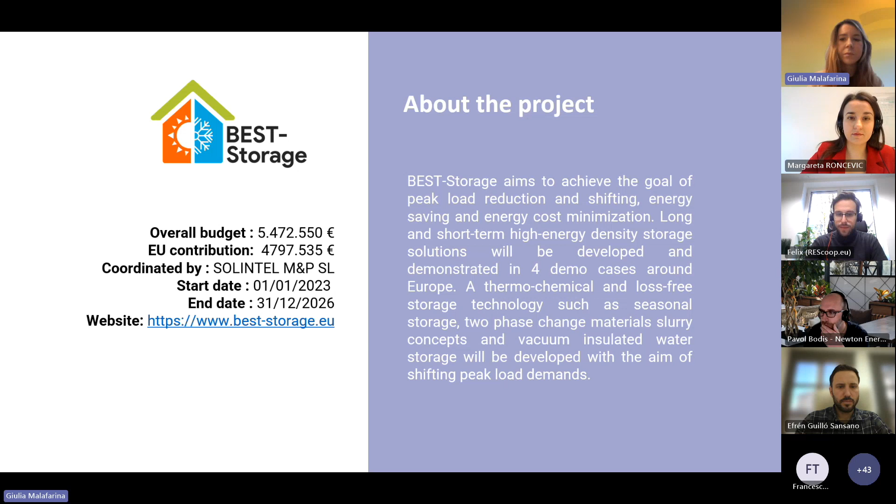Now, without taking too much of your time, I would like to give the floor to our first speaker. Margareta Roncevic will give the opening statement. Margareta works as a Junior Policy Officer for the European Association for Storage of Energy, dedicated to advancing energy storage solutions in the European Union. She actively monitors energy storage legislation, leads work groups on key topics, and engages with members and stakeholders. Her main areas of expertise include thermal energy storage technology, sustainable batteries, and different legislative acts.

She also has previous professional experience in public policy and project management. Today, Margareta is going to give us an introduction and an overview on thermal energy storage solutions. But without further ado, I'll give the floor to you, Margareta, please.

Thank you very much. Yes, well basically, you said everything - I also had a little speech, but you covered pretty much everything. First of all, thank you for inviting me, and I'm very happy to be here. As already said, I will give you a short introduction on thermal energy storage, a bit of an overview on what we do as the European Association for Storage of Energy, and at the end of the webinar we will have time for questions. You can also send them in the chat.

So I will start with the presentation on our association, the European Association for Storage of Energy. I will give you a brief overview on the energy storage technologies in general, and then we will focus on thermal energy storage specifically. So what do we do as a European Association for Storage of Energy, or EASE?

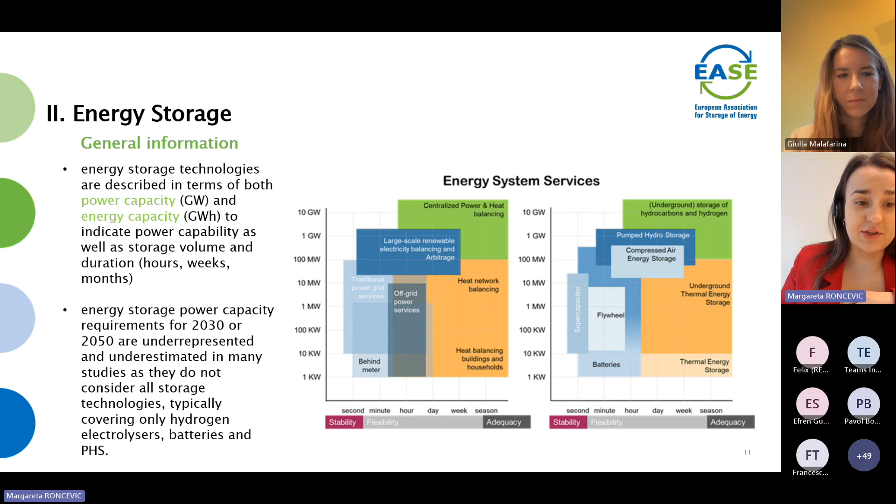That is something you constantly hear, at least at the European Union level. However, we don't only represent batteries or hydrogen—we're a technology-neutral association. So we cover all of the other energy storage technologies, which there will be a slide on later.

In terms of applications and why energy storage is important in the energy transition, these technologies can provide ancillary services to support the distribution infrastructure, services to support transmission infrastructure, and many others. Of course, not every single energy storage technology can provide all of the services listed on the slide, but each technology does have its place within the system, within different projects and business cases, and can excel in certain services in some way or another.

In this slide, you can see all of the family of energy storage technologies that we support or represent. As you can see, it's much more varied than just batteries or hydrogen. Of course batteries and hydrogen have their place, as I already said, but there is also thermal energy storage, mechanical, and so many more others.

We are today going to focus, of course, on thermal energy storage. As you probably already know, thermal energy storage is one of the, we would say, more neglected storage technologies in terms of how much it is recognized in legislation, specifically in the European Union. This is something that, for example this year, we have been working very hard to gain more traction on these specific technologies.

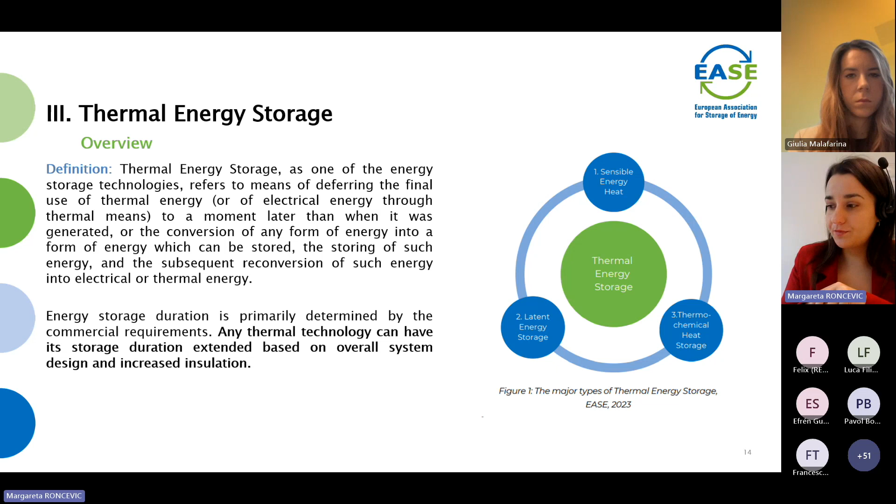We are going to go a little bit more into detail on these principles of thermal energy storage. As you saw on the previous slide, we have three main ones. With the sensible heat storage, this is the most common one, the one that you're going to find the most in commercial uses. For each one of them, we put what is the energy storage temperature range and the storage duration, and again, this can be adapted. The differences between these technologies are, of course, the materials that they use and the types, so if it's going to be liquid, if it's going to be gas, and so on and so forth.

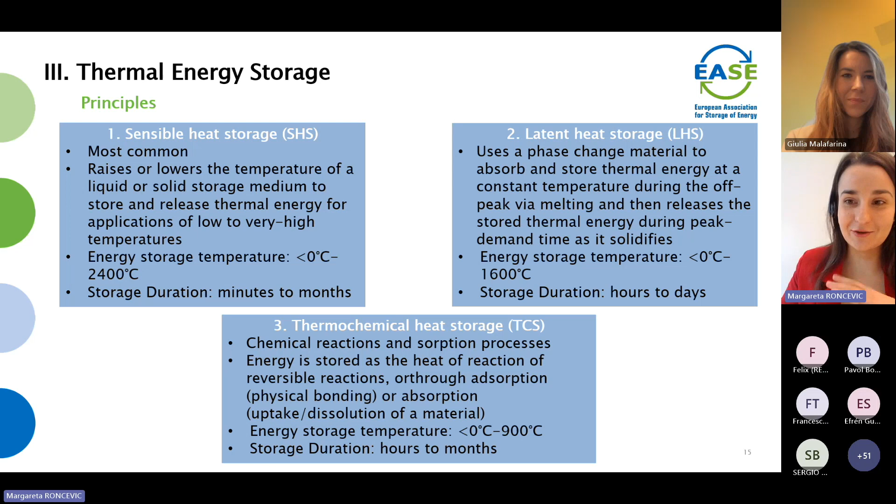Again, all of these storage technologies have their own research potential. Within the subtypes, they have different technology readiness levels, which are rapidly changing. I'm not going to read you out all of these definitions, but if you have any more questions and want to learn more, please feel free to ask later.

Something I would highlight is that this topic of industry decarbonization is gaining more and more prominence, more specifically in thermal, when talking about thermal energy storage. So you will probably hear a lot of applications of thermal energy storage in industry decarbonization webinars and potential, and it is one of the best energy storage technologies to be used in this segment. Now, of course, it doesn't mean it's the only service or the only area where it can be used, but it is definitely something that thermal has great potential in.

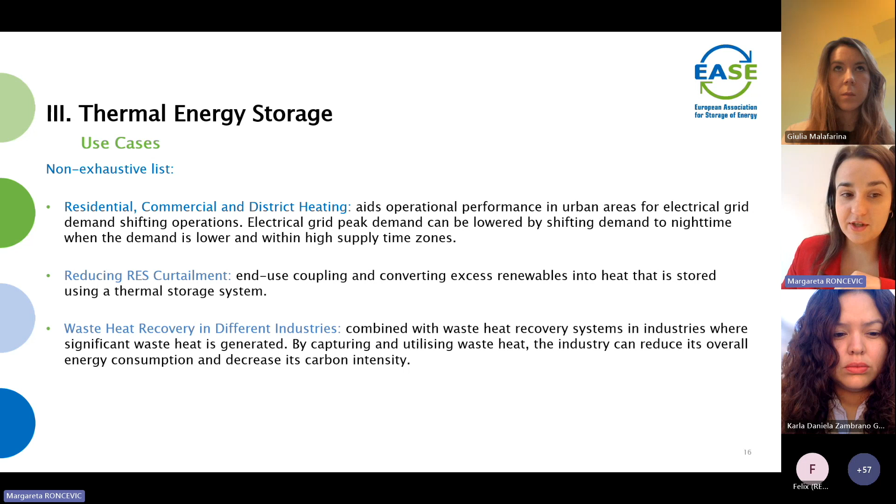The challenges that thermal energy storage faces in its deployment reflect the challenges that other energy storage technologies face. So there's no big differences between, for example, thermal and mechanical energy storage. The only thing that would be different, for example with batteries or hydrogen, is that they are much more recognized on the regulatory level, as you may be familiar.

This year we have published - the European Union has brought the batteries regulation into force, which addresses the whole life cycle of the battery, which is quite substantial and quite good in terms of incentives and recognition. What we would like to see is an energy storage strategy on the European level, but also specifically addressing other energy storage technologies. But okay, we need to go step by step.

For the specific regulatory challenges that thermal is facing, one of the biggest ones would be the double taxation. Again, this is something other energy storage technologies are also facing, which basically means that the taxation occurs when the stored energy is taxed - both when it's initially purchased or generated, and then again when it is discharged or utilized. So of course this leads to a great economic burden and discourages the adoption of energy storage technologies. There's also a lack of financial incentives, again because it's not recognized on the regulatory level.

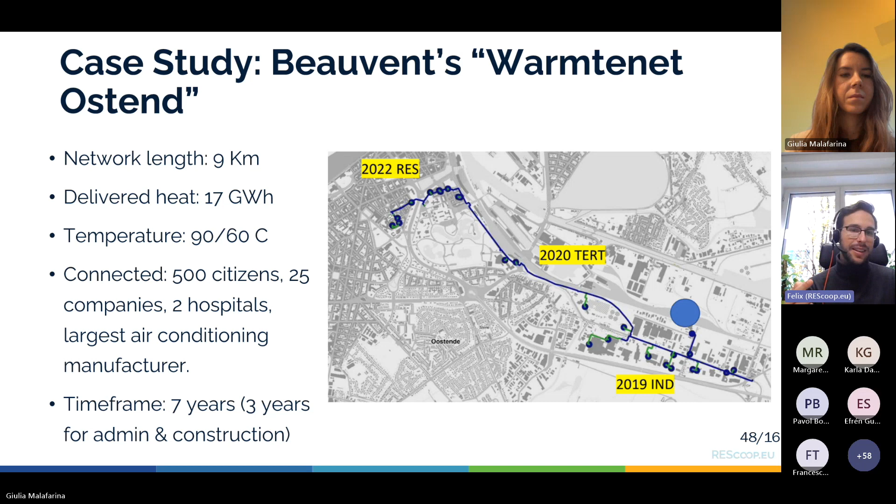Once they were comfortable enough with knowing how to operate the district heating system, they decided to open it to citizens, because you need to make sure that you do it well. Because you don't want people to be disappointed at the project, because that means that they will be disappointed at the transition itself. So this is an interesting case, because first they focus on the consumers of heat rather than in getting membership.

I mean, they do many things, right? They do, for instance, a renewable energy festival in summer. And in this energy community is citizen-led, but it also has municipalities and SMEs in it. So in this case, they do festivals in summer, like I said. But here they decided to work together with a kindergarten, because the children were very curious about the renewable energy.

So the kids decided to go to coffee houses and take their waste coffee. And from this waste coffee, they gave this to the energy community. And the energy community made coffee pellets with this.

So between the waste coffee that the children were gathering, and the municipal prunings from the forest, because it's in the mountains, they were able to do a new kind of energy, if you will - a new kind of pellet.

And the children gathered around 1 ton, so enough coffee to make 1 ton of pellets. And the energy community told them, now you can do as you please with this energy. So of course, for the first time, they were able to reach thermal comfort, renewable thermal comfort, for a year in this kindergarten.

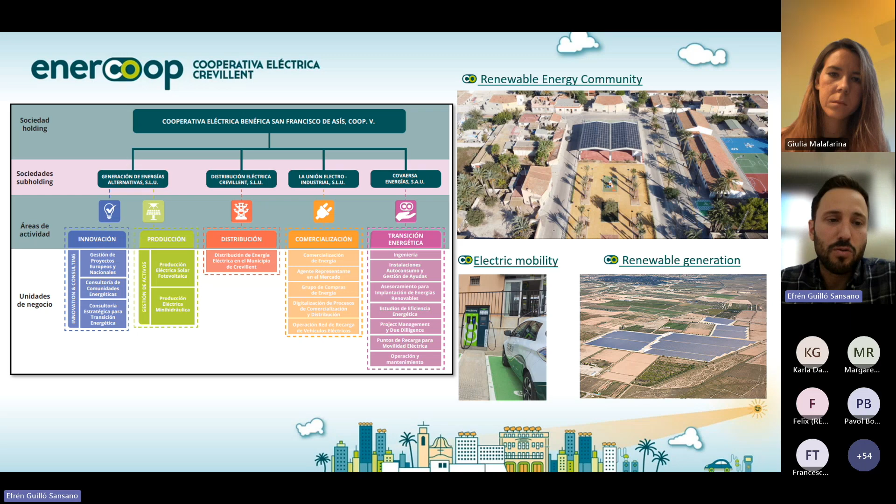As I said, we were founded 100 years ago, but as Felix mentioned, the regulation on energy communities started in 2019 or so, and that's when we started our transition from a historical energy cooperative to an energy community, because the values and principles are mainly the same. That's when we started our most iconic project: the energy community for municipal energy transition in Crevillent.

You can see here a picture of one of our PV installations, which was not just a PV production installation, but we did the whole project of the park and the space below it. It was a project beyond a PV production installation, more a space for community members to participate and be part of.

And also in these installations, we currently have an energy storage system that we use for this collective self-consumption installation.

So what's the model of our energy community? Basically, it's formed by most of the municipality of Crevillent, and we have some collective self-consumption installations, mainly of PV energy, due to the location of our energy community. Here it just rains sand rather than water, so that's what we have and take profit of.

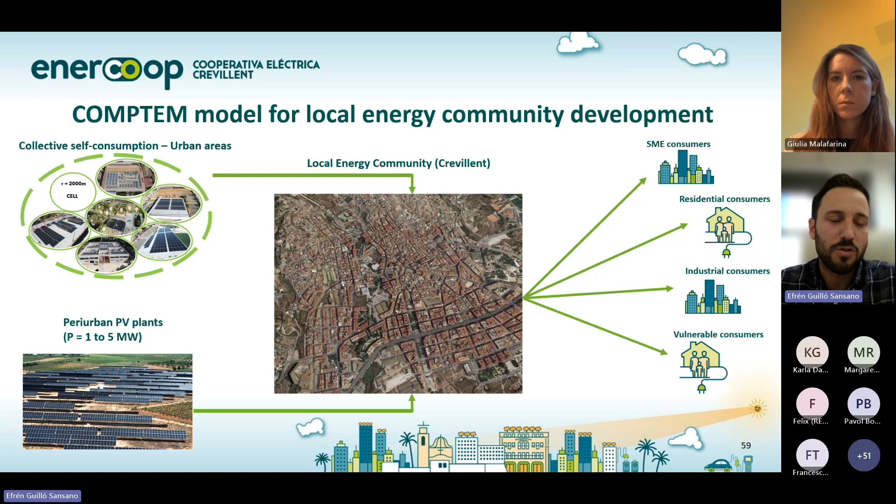But obviously we have an issue, and this is how I would introduce the role of energy storage in energy communities: production and consumption of energy is not done synchronously, but for the energy network, the electricity or energy you're producing needs to be consumed at the same time. It needs to be a balance, and that's where energy storage comes in.

As I said, one of our self-consumption installations already has an energy storage system. In this case, it's not thermal, it's an electrochemical lithium-ion energy storage system. That was part of a previous innovation project that is now completed, the MERLON project, in which we installed this energy storage system for different reasons.

One reason is the optimization of cost. With energy storage, we can store energy and consume it at times when prices are higher, but also for security of supply. We could work with this energy storage system disconnected from the network, so in case there's an event in the network, we have security of supply for the members of the community.

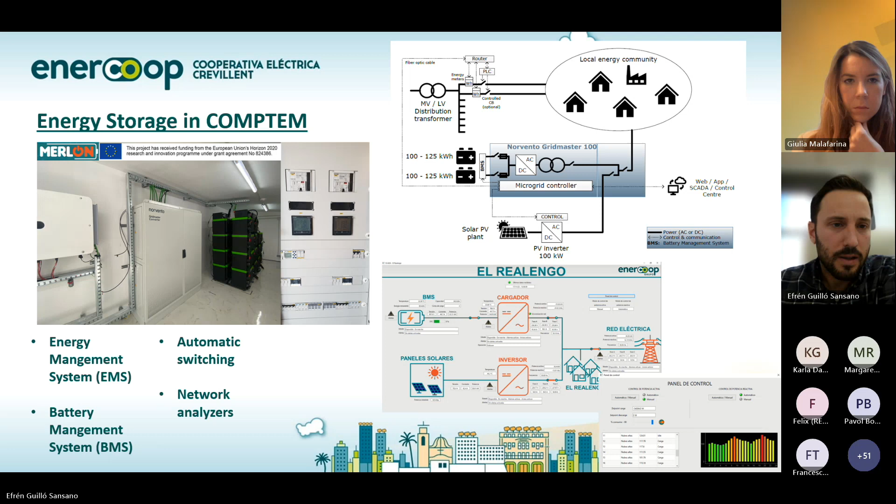But we believe this is just the beginning, and there's more to go. We are involved in different innovation projects, one of which is ECHO, in which we are participating towards identifying the potential of thermal energy storage in our energy community, but also in order to provide services to the system and optimize the use of both thermal and electrical energy storage.

We are also involved in other projects such as STREAM, which looks at flexibility in local energy markets that will be required in order to participate in the energy system, being able to sell services from these energy storage systems. We also participate in other projects related to data, which is key in order to optimize the use of these energy storage systems, and mainly also in the energy community, where private data is sometimes required in order to optimize this system with the demand of the members.

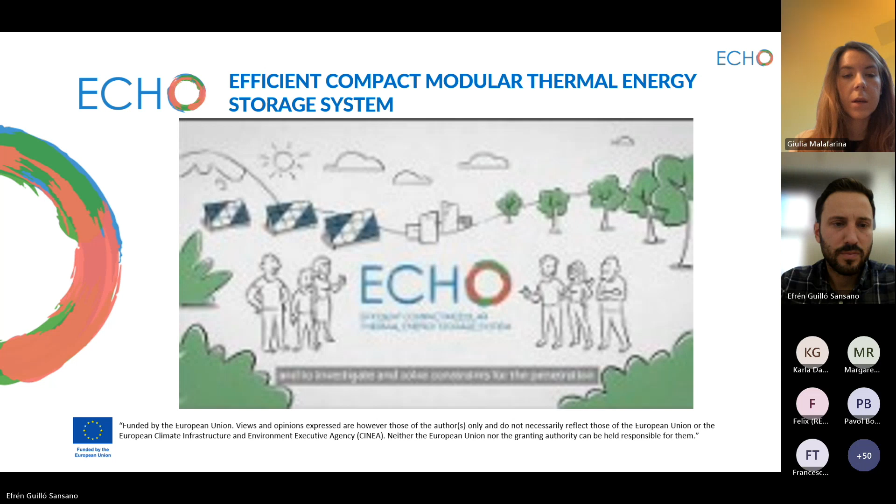So I'll just introduce the ECHO project, with a very nice video that will introduce it better than I will, and I'll talk about it after that. Okay.

So that's the introduction to ECHO. I won't go into the details of the technologies of the materials because I'm not a material expert. I'll leave that—if you want more information, send me an email and I can direct you to people with that expertise. But my expertise is more on the integration of renewable and energy storage into the grid, so I can touch a bit more on that front.

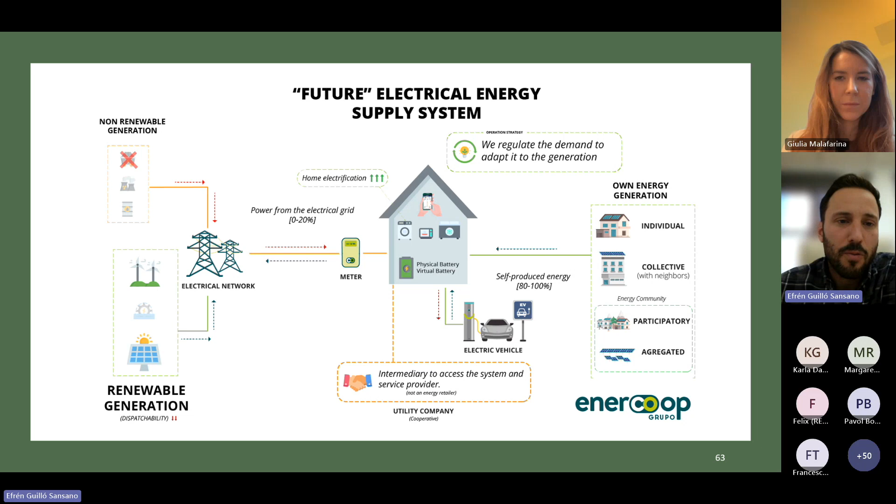So why do we need this energy storage? It's because we are moving to this future electrical energy system, which has non-dispatchable renewable generation instead of the dispatchable nuclear, coal, or gas generation we used until now. We also have production from our side, not just the electrical side, and we are increasing electrification quite a lot, mainly due to transport and heating and cooling. That's the main loads being electrified, and we need to understand all these dynamics. In order for the system to work as it has so far, we need this energy storage to balance everything.

So the ECHO TES, this thermal energy storage, will be adaptable, modular, and flexible, so you can charge it directly by an internal heat pump, or exploit grid overproduction when it's cheap, or even use renewable energy sources in each household. But it can also provide system services. One of the main advantages of energy storage is load shifting or peak shaving of the energy load profiles, which brings cost and energy savings to the community, and also the potential to participate in flexibility energy services to the grid.

However, regulation still—as Karla said—there's a ground and a clear objective to work towards, but regulation isn't there yet to provide these flexibility services to the grid, at least in Spain. There's some work on demand response, network codes, and so on, but nothing final, so there's no possibility yet.

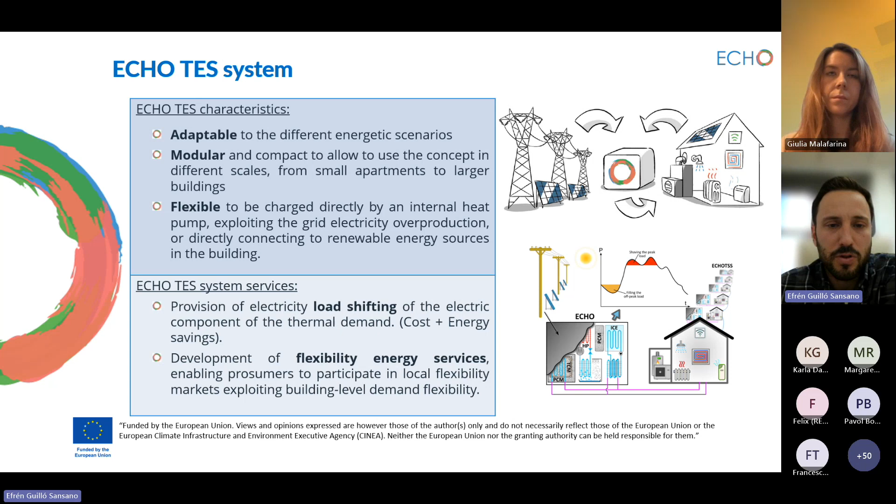So just to finish, how do we see the whole picture? We will have a smart building where heating or thermal loads and electrical loads will be not just loads, but also flexibility from energy storage and renewable generation, all interconnected—for example, through an ECHO TES system. But we go further in the ECHO project, and we try to assess the impact in an energy community such as ours: what would be the effect if each house in our community, the 11,000 members, had one ECHO TES, and what type of services they could provide in an aggregated manner through an energy community manager?

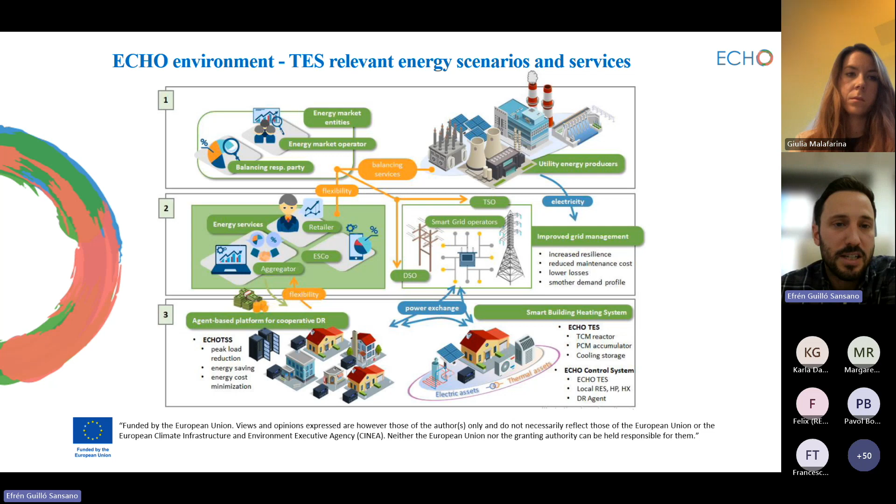So what impact can that have, either in the community electricity prices of the members, or in the grid of the community? How could we support the grid with these energy storage systems? Basically that's the key impact we, as Enercoop, will be assessing within the ECHO project. So thank you for your attention, and if you have any doubt, I'll answer now in the questions and answers.

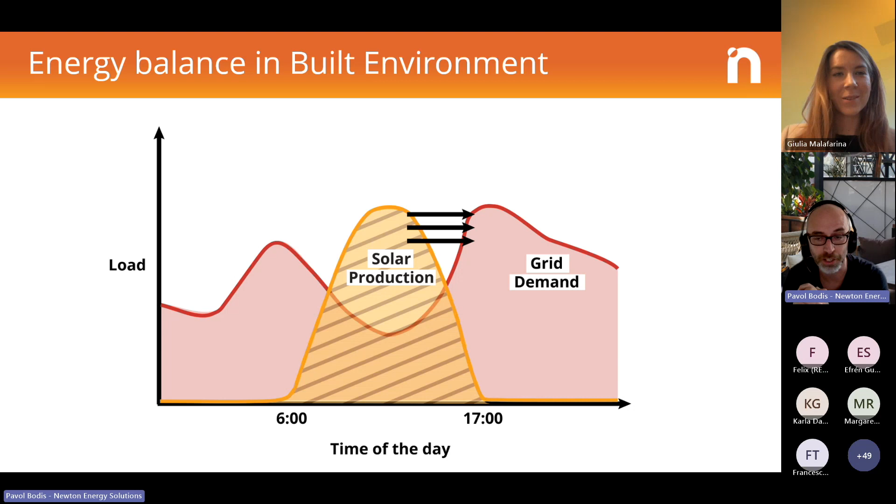So why do we need more options? What else is out there? What are the things we need to address, and how do we address those issues? Effectively, we need to create energy systems that are cost efficient - we have to drive down the cost of the products and the cost of using them, which has to do with maximizing the use of green and cheap electricity or energy, and also minimizing maintenance and increasing the lifetime of the product, which adds not only economic but also environmental value.

The next important aspect for the built environment is compactness. We can build systems that are cheap, but if they're too big they'll never be applied in buildings, so compactness is a very important factor - not just compactness in terms of capacity stored, but most importantly the amount of energy that can be released after the time it was stored. So if I aim to store energy for a few weeks, I need to make sure as much of it as possible is still available - my energy losses, my energy performance, have to be of utmost importance. Last but not least is the cycling efficiency, which has a lot to do with the amount of green energy being used and the amount of energy losses within the system.

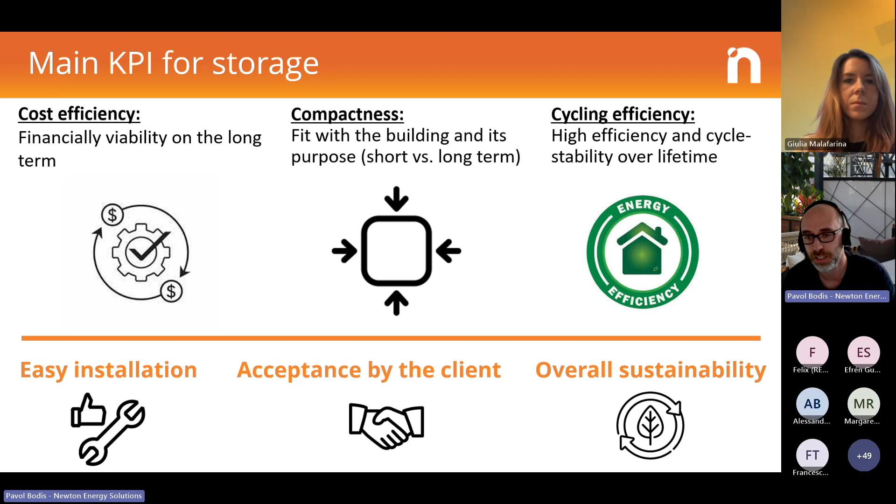Last but not least, what's important is also the societal aspects, or aspects that have to do with acceptance of the technology by the client. This is something we found out in our research, originally when we worked within TNO: you can build a cheap system, you can build an efficient system, but as long as a client will not accept it in their building, it is not going to be sold, it is not going to be implemented. And it has to do with sometimes emotion, sometimes fear, and sometimes just legislation that does not allow specific technologies to be placed within the built environment. These restrictions are really critical for us to be aware of so that we can choose the right technologies for the right type of application.

Now, what do we do exactly? We effectively, in our company, have a product called NEStore, which stores hot water at very high temperatures, up to 110 degrees, with virtually non-existent energy losses.

Just imagine you put a cup of tea on your desk, you come back a month later, and your cup of tea is still hot. This is something we don't normally experience because we know hot water tends to get cold. However, if you remove all heat bridges, all means for the heat to leave the system, the hot water will remain hot for a very long time. That enables you to store a far larger amount of energy in a relatively compact space, because your delta T can go up, and this means your energy capacity can go up.

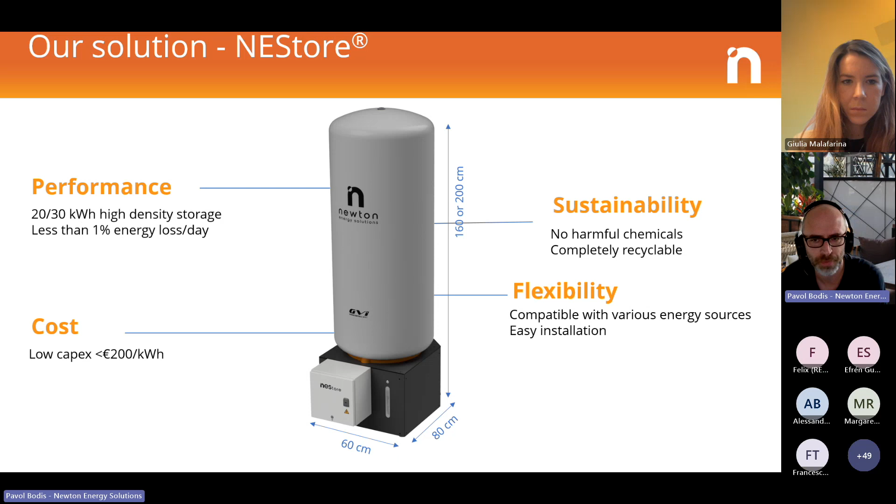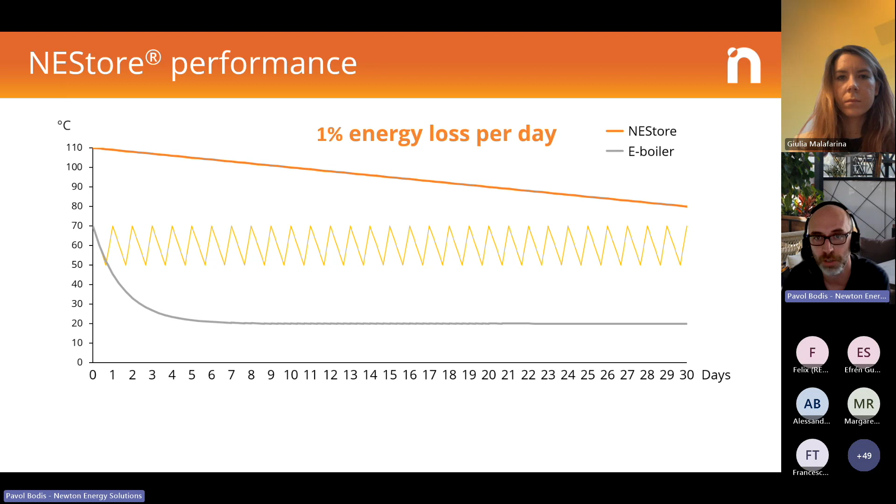If you look at our product, you see that the energy within the system, after being connected to the building itself, remains there for a very long time. As such, our product provides a crazy amount of flexibility, and thus reduces not only the costs of the energy used, but also significantly increases the percentage of green energy used by the building itself. This is the step we've taken within one of the previous EU projects, and we translated it to a company and to a business case and business model for our clients.

Now let me move to the part about the typical business cases for the end users. Obviously, in many countries, you're looking at three typical business cases of how energy storage can provide economic value. One is increasing the self-consumption of your own PV, or other energy sources you have in or within the building, to make sure you use the energy you produce yourself, since that energy typically doesn't have taxes associated with it, and is typically the cheapest to use because it was effectively pre-financed.

A second additional value could be a reduction of your grid costs. This was addressed a little in the previous presentation, where if I have a lot of solar panels installed on my roof, during summer days for example I tend to send a lot of energy to the grid, filling it with green energy and creating balance issues in the grid itself. This means that in many situations already in Europe, as an owner of such a building, you have to pay additional costs to the grid operators who then have to strengthen the grid. If you apply storage, however, you can defer those costs and investments, and your grid connections can remain lower.

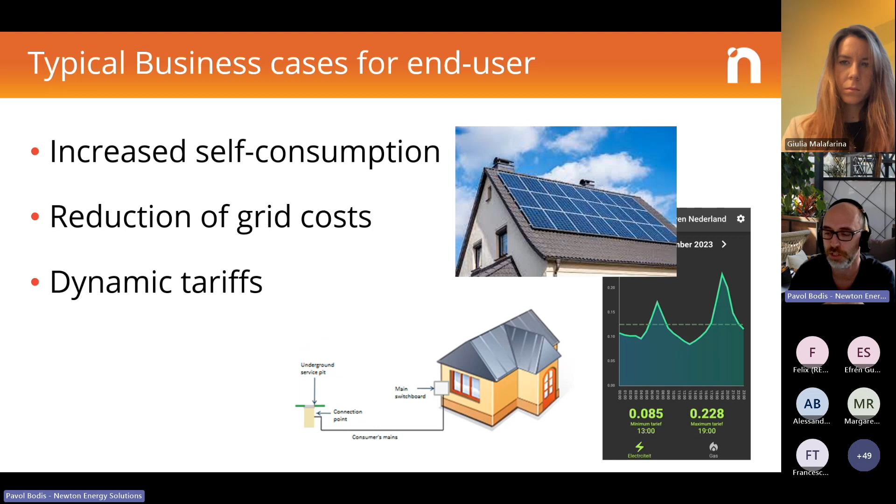Now let's zoom in a little bit about the increased self-consumption. What you see here are very important aspects that play a role in how much money, or how quickly, you can earn back the cost of your energy storage.

That has to do with the type of contract you have. Do you have a fixed electricity cost? Do you have feed-in tariffs? And how is your net metering behaving? Also, what is the time frame of your net metering?

In the example I gave before, on the hourly basis, the net metering behaves on a level where every 1 hour your cumulative amount of electricity produced is subtracted from the electricity consumed from the grid, and the balance is either paid to you based on the tariff, or you pay the grid operator for that hour of use.

However, there are also cases in some countries, for example in the Netherlands, where the time frame of the net metering is 1 year, which means I accumulate all my energy produced with my solar system per year, and subtract that from the amount of energy I consumed per year. In this way, the energy grid serves as a huge battery, and in those situations I have absolutely no need for energy storage in an economic way.

As you can see, per country, even per region, there could be major differences in the way the government or regional government applies policy, which can make energy storage very cost effective, or can make it absolutely economically uninteresting.